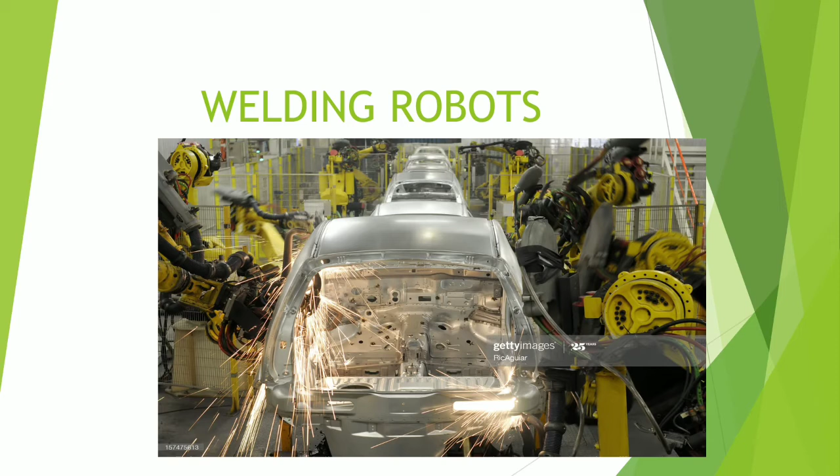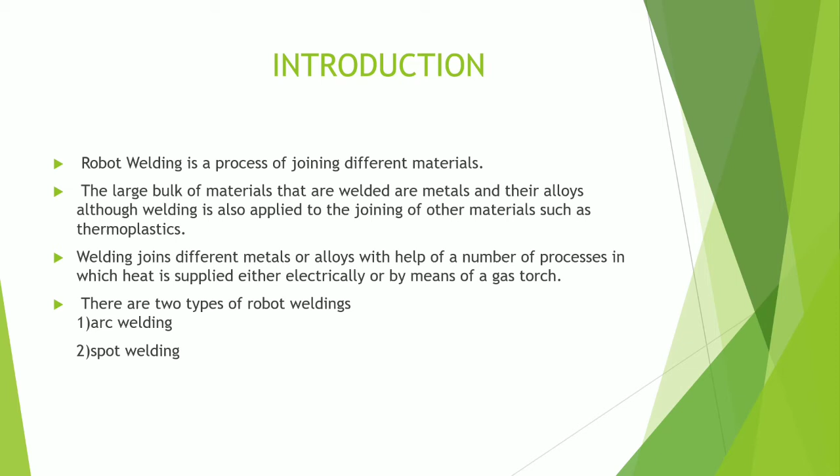Introduction. Robot welding is a process of joining different materials. The large bulk of materials that are welded are metals and their alloys, although welding is also applied to the joining of other materials such as thermoplastics. Welding joins different metals or alloys with the help of a number of processes in which heat is supplied either electrically or by means of a gas torch. There are two types of robot welding: first, arc welding and second, spot welding.

So, why robot arc welding? Why do we use arc welding? Arc welding is performed by skilled workers who are assisted by a person called a fitter. The working condition of the welder is typically unpleasant and hazardous. The arc from the welding process emits ultraviolet (UV) radiation which is injurious to human vision. Because of the hazards for the human worker in continuous arc welding, it is logical to consider industrial robots for the purpose of arc welding.

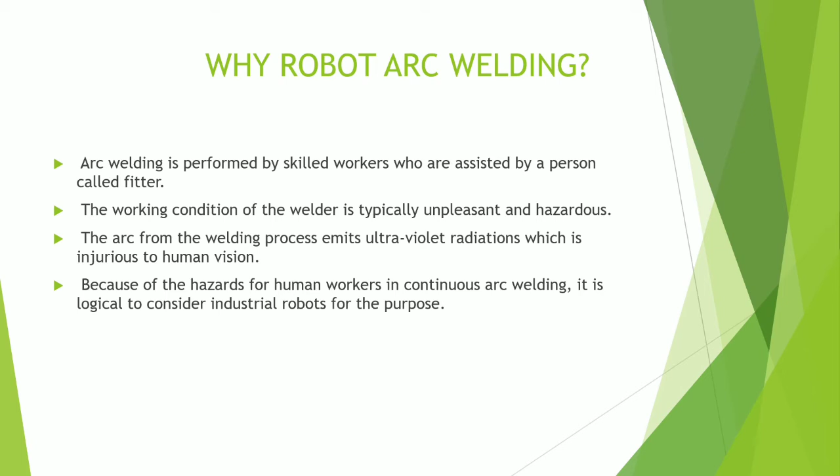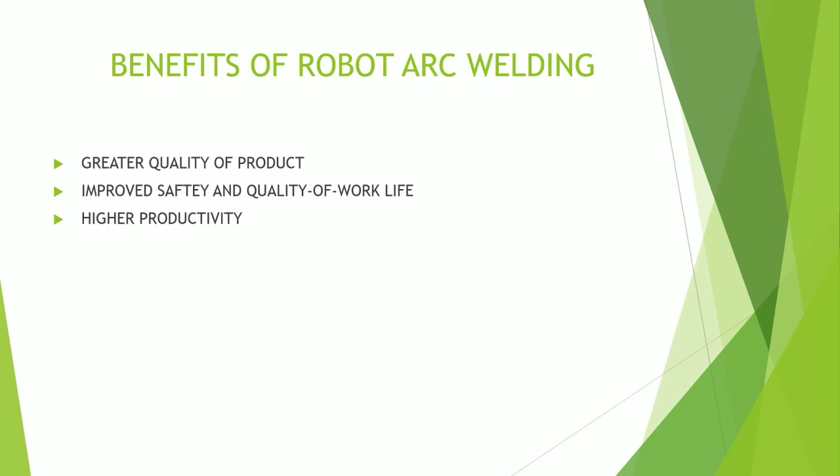Then, benefits of robot arc welding. Greater quality of products: we can ensure precise welding by the robots compared to humans. Improved safety and quality of work life: robots can also work in environments which are hazardous to humans. Higher productivity: robots can work with the same speed and accuracy till the finish of the work. So this is the best advantage.

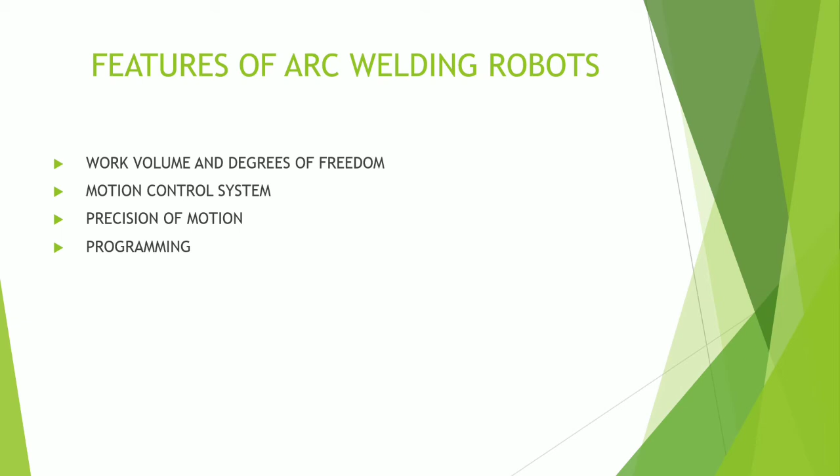Features of arc welding robots. Work volume and degrees of freedom: robots can work on a large volume of products and have several degrees of freedom. Motion control system: in a robot, there are many systems to control the motion. One famous one among them is the two-handed control system, which is also used to prevent falls or unwanted cycles. Precision of motion: robots work according to our given path. Programming: we can feed different programs according to our convenience.

So in this picture there is an arc welding robot. There is a robot wrist and gripper which is used to grip the product.

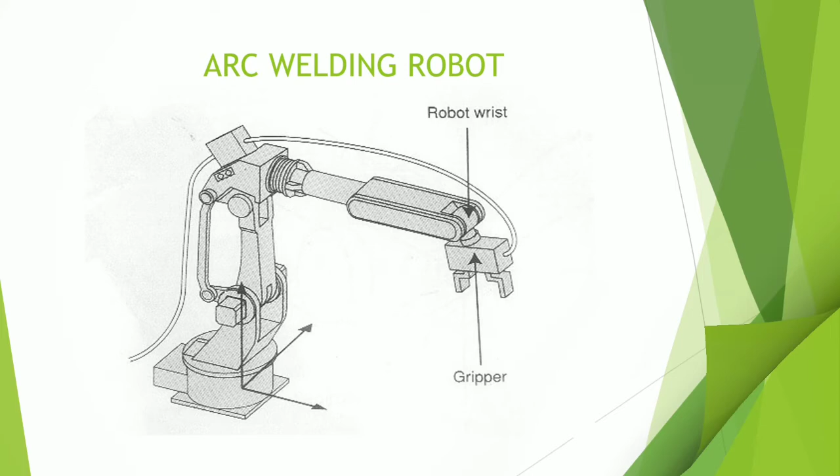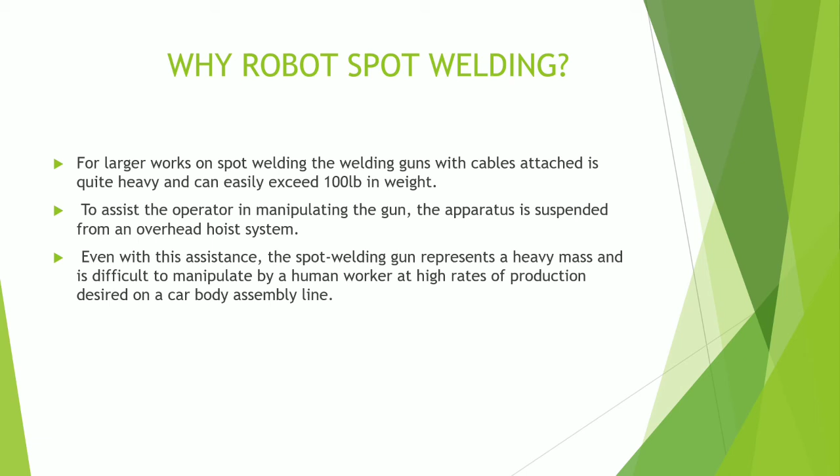Why robot spot welding? So why do we use spot welding? For larger works in spot welding, the welding gun with cable attached is quite heavy and can easily exceed 100 lb in weight. To assist the operator in manipulating the gun, the apparatus is suspended from an overhead hoist system. Even with the assistance, the spot welding gun represents a heavy mass and is difficult to manipulate by a human worker at the high rates of production desired on a car body assembly line.

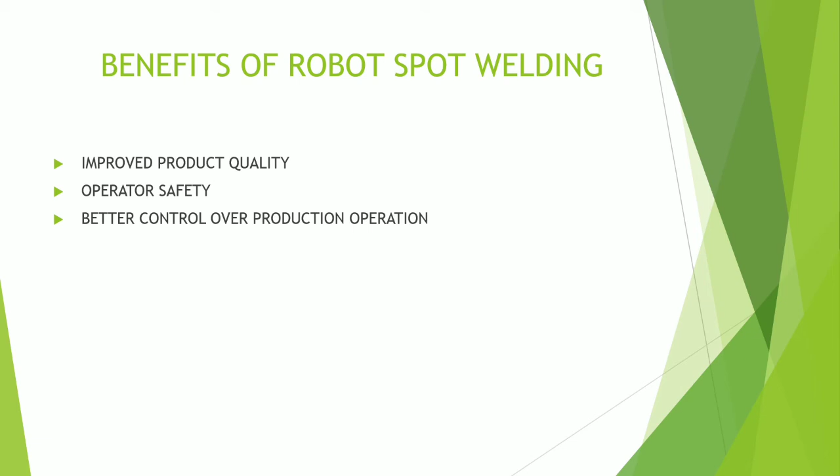So, benefits of robot spot welding. Improved product quality: obviously, we are using robots, so the quality of the product will improve. Operator safety: in robotic spot welding, there are many safety devices for the operations such as safety light screens, safety interlock switches, and two-handed controls. Better control over production: through programming, we can control the production speed and accuracy according to our convenience.

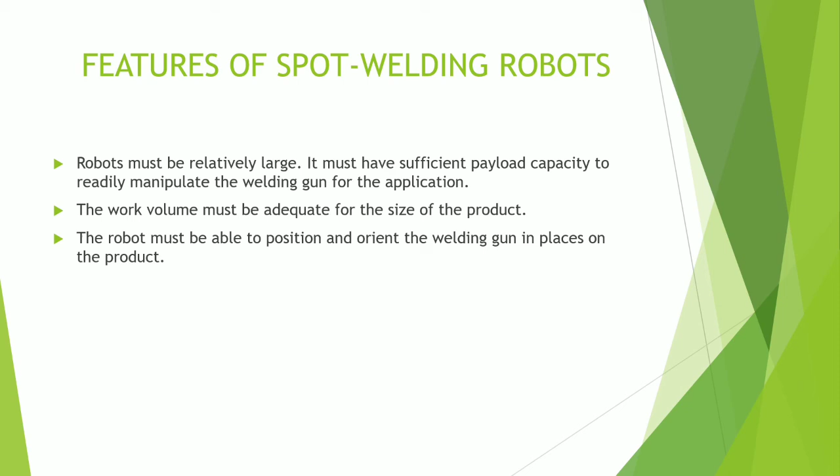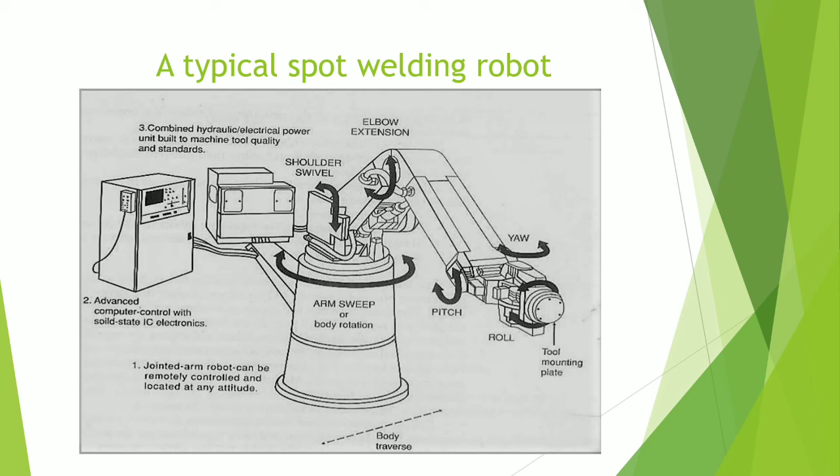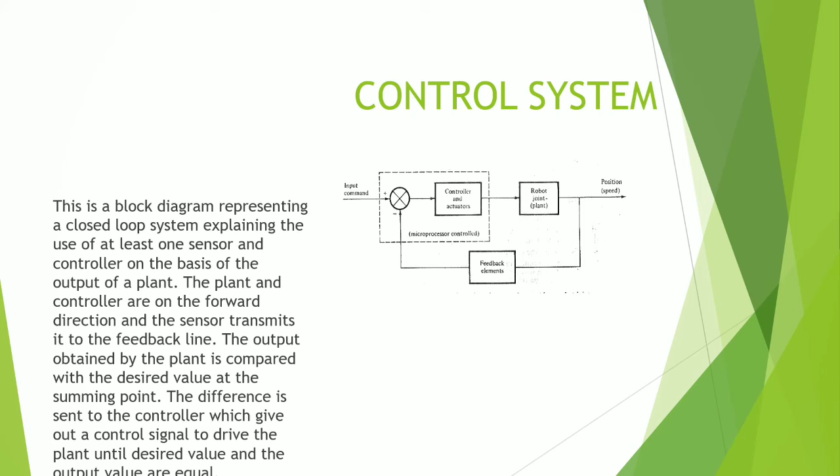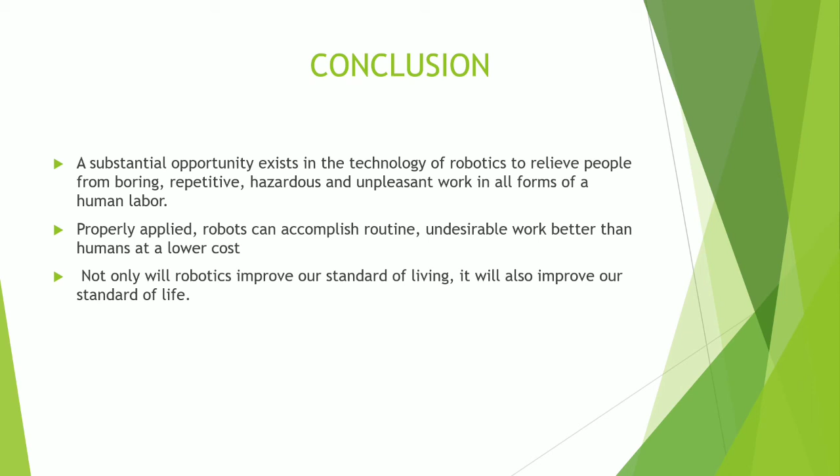Conclusion. A substantial opportunity exists in the technology of robotics to relieve people from boring, repetitive, hazardous and unpleasant work in all forms of human labor. Properly applied, robotics can accomplish routine, undesirable work better than humans at a lower cost. Not only will robotics improve our standard of living, it will also improve our standard of life. So, thank you.